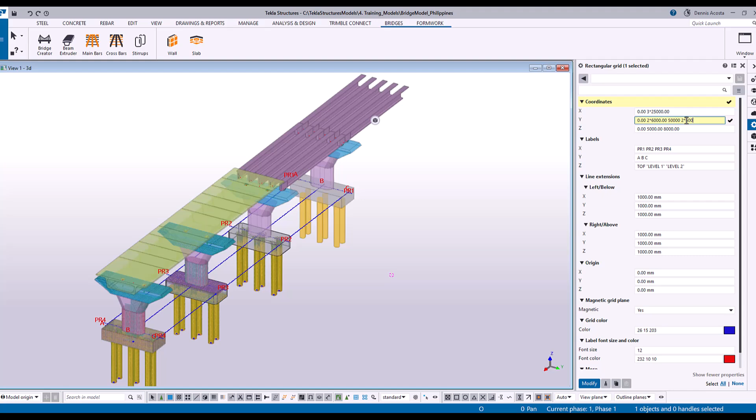Let's record. Okay, sa grid line, we'll start with a grid line. Sa grid line, doon sa Y direction, after 6,000, you type space, and then add 50,000. And then space, 2 times 5,000. And then you will get this one.

Parang naglagay lang ako ng additional grid para ito yung magiging working grid ko to create the pier. Okay? So after 6,000 sa Y direction, mag-add ka ng 50,000 or even more if you like. And then i-right-click mo, fit work area. Okay? And then mag-add ka ng 2 times 5,000.

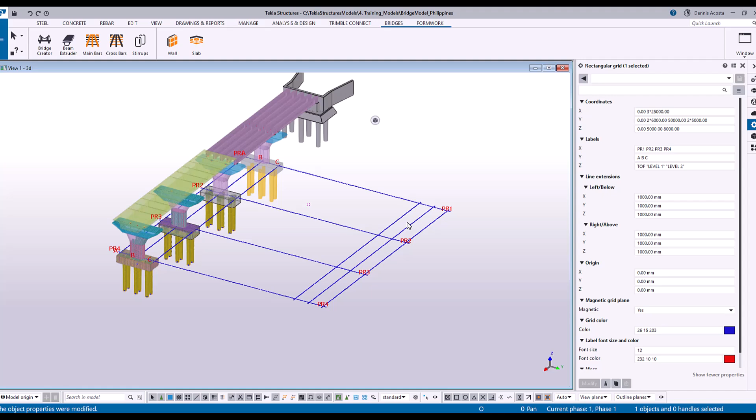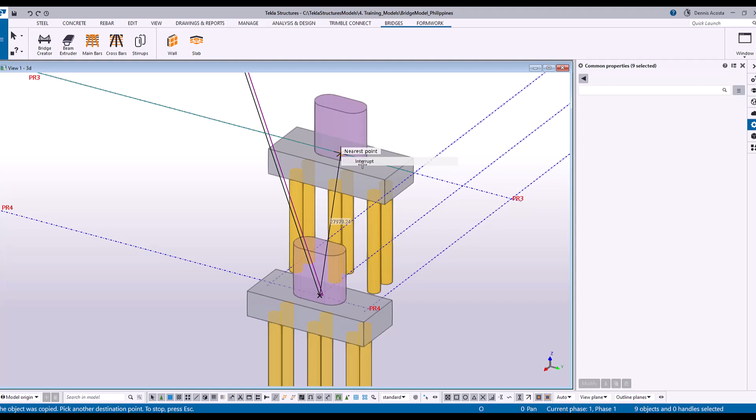Okay, so next is ang gagawin ko rito is I'm going to copy ito. Kopyahin nyo yung isang part. Copy. Put it here. So ang kinopya ko lang, kasi gagamitin pa rin natin yung nasa bottom part.

So ito, gagawin lang natin itong sa halip na 5,000, gawin natin itong 10,000. Okay? Ginawa ko lang siyang 10,000. And then,

Maglalagay ngayon tayo dito ng beam. Okay? Yung beam. So actually sa beam, as much as possible, kung meron tayong... what you call that? Kung meron tayong profile with a shape, it's better kaysa sa mag-cut tayo.

Kasi yung cuts medyo, ibabayin mo pa. Pero kung meron tayong shape, much better. So siguro, ang gagawin natin dito is let us create our own profile. This one. Kasi hindi pa natin natutunan yesterday yun, pinakita ko lang sa inyo. Let's try today. Kasi yun din naman ang start ng custom component. Magkakaroon tayo ng konting equation, pero madali lang siya.

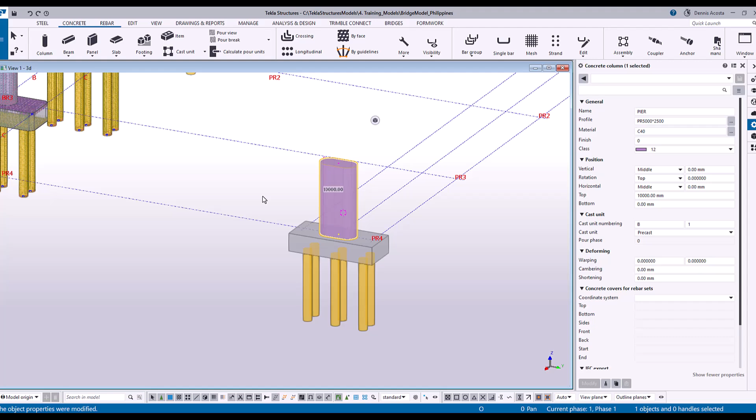Okay, so look. Just follow my lead. So once you have this, kindly go to the catalog and then define profiles and then define cross-section in Sketch Editor. So these are mostly advanced training, pero we'll make it simple para mas maintindihan natin. Okay? So punta lang kayo sa catalog and then define profiles and then define cross-sections.

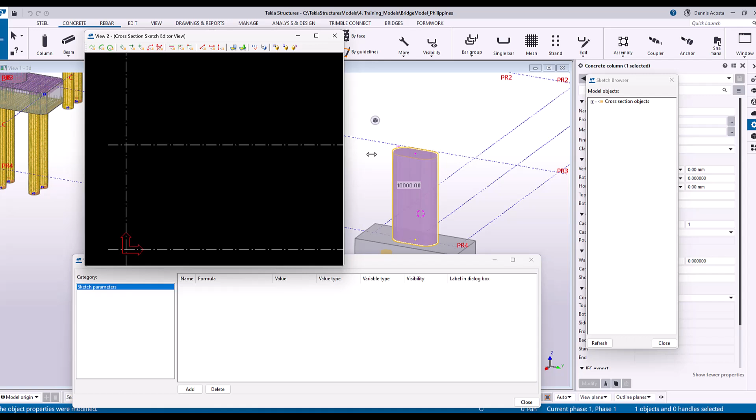Okay, done? Ito yung in-install natin kahapon na solver. So ngayon, may open nyo na siya. So this is another editor in Tekla Structure. Okay, new editor sa Tekla Structure. So ang gagawin lang natin dito, since we called it Sketch Editor, so we can sketch the shape. Okay, we can sketch the shape.

Okay, so just do this, look. Sa dulo, makikita nyo, sketch polyline. So lahat nandito na. Sketch polyline. So click nyo lang yung sketch polyline. And then pwede na tayong mag-sketch dito. I-zoom in nyo lang ng konti. Kasi pag sinunod nyo yung grid lines, masyadong mahaba yan.

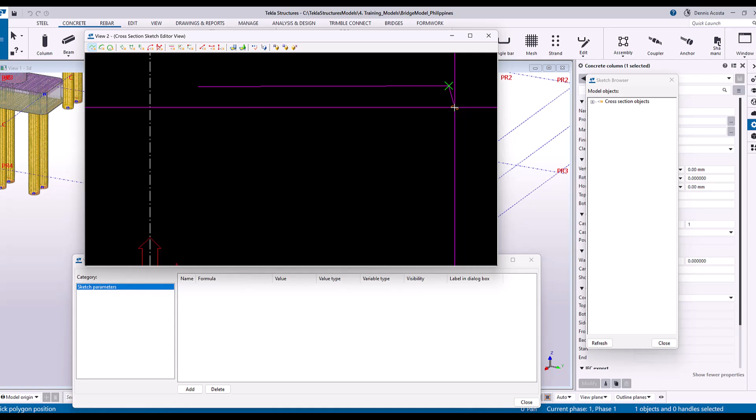15 meters yan. So look ha. 1, okay. 1, 2, and then 3. Actually, pwede ka nga maglagay dito ng... hindi, straight na lang natin. You press O para hindi siya naka-ortho. Again, ulitin natin ha. Sketch, polyline. 1, 2. Kahit hindi siya straight, no worry ha. 2, 3, 4, 5, 6, 7, and then middle button of your mouse.

So make it sure na nakuha nyo tong shape na to. You don't need to close it. Just sketch similar to this. Okay? Don't worry kung siya ay nakaslant. Doesn't need to be straight. Okay? Don't worry. Kaya nga ano yan sketch lang siya, sketch.

Yeah, okay lang sir. Okay, good. Okay na.

Okay, so now, bakit natin hindi close? Kasi meron tayo dito tinatawag na coincident constraint. So ibig sabihin, merong tools dyan para i-close it. So kung mapapansin nyo, dito sa menu, hanapin nyo itong coincident constraint.

Okay? So i-click nyo siya. Click nyo siya and then pick the two ends. 1 and then 2. So ayun. The reason why, minsan kasi, akala natin naka-close na siya, pero hindi. So it's better, open it and then use the coincident to close it.

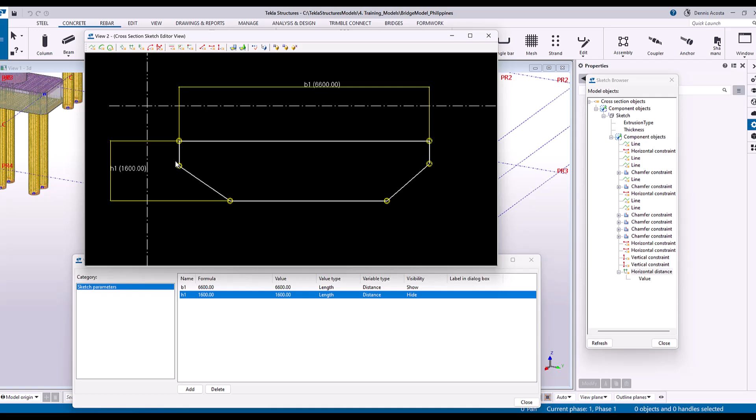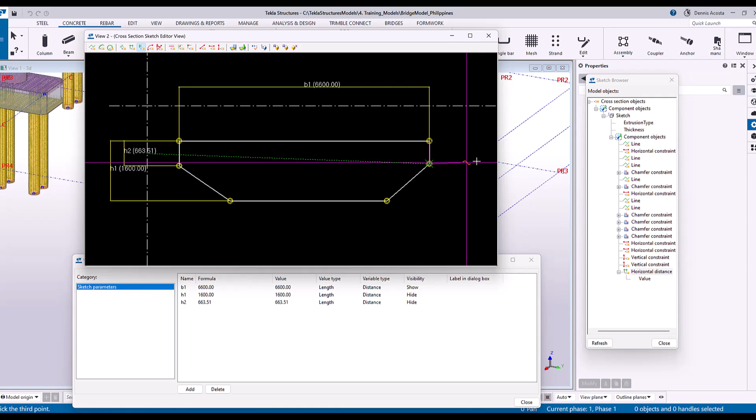This one. Kung mapapansin nyo, sketch uli ng vertical, itong dalawang side na to, maglalagay tayo ng dimension dito. 1 and then 2. So, yung H2, gawin kong 600. Okay, ginawa kong 600 yung H2, di ba?

Ngayon, yung H3, para maging 600 din siya, lalagyan ko ng simple equation. Ano yung simple equation? Equals H2. And that's it. Ibig sabihin, kung ano yung H2 mo, yun yung H3. As simple as that. Sige, pakisunod yan.

So B1 is the length, height, and then H2 and H3.

Ngayon, ang tanong, sir, how about itong height na to? Do I need to add dimension? No need. Because kung ano man yung difference ng H1 and H2, that will be the height of your slope. So no need na. Kasi pag nilagyan mo yun, magkakaroon ng complication.

Okay. Walang ano yan. Kasi nagkaroon, kasi siya, dapat mas malaki to kaysa dito.

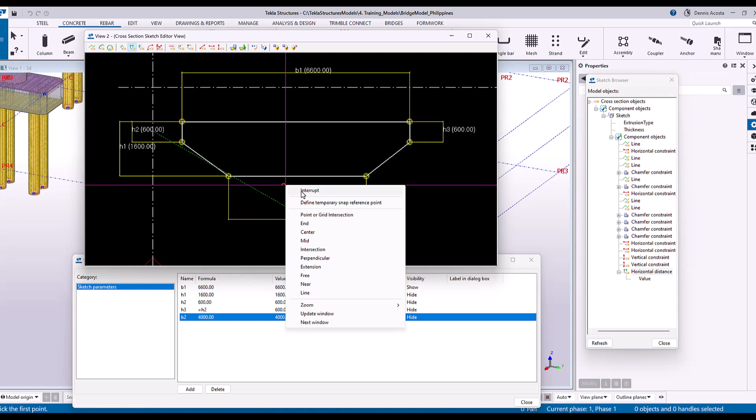So, kung mapapansin mo, gawin natin 4,000 lang. Okay, sa inyo, gawin nyo lang siyang whole number, okay? So to make it a center, click here, 1 and then 2.

So mapapansin nyo, meron ditong B is 1346. Tama? Ngayon, to make it center, tatanggalin natin itong value sa B. Yung B natin ngayon,

B3, magkakaroon tayo ngayon ng formula. Ano yung formula? equals, open parenthesis, B1, minus B2, divided by 2. Okay? So kung ano yung sagot dito, automatically, magiging equal siya. Tama? So here, it will be equals B1 minus B2 over 2. There you go.

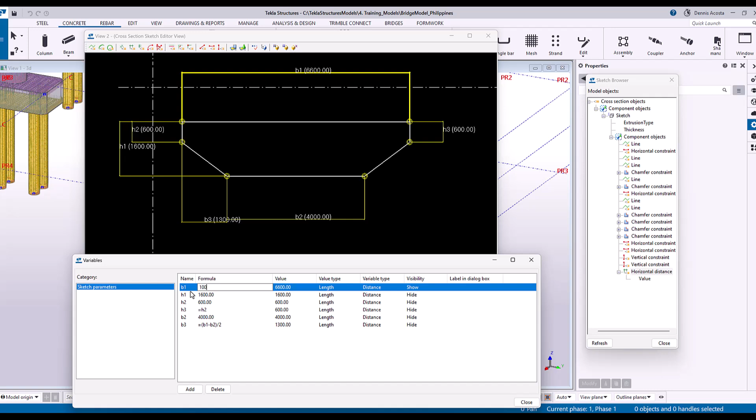1, 3. So kung ang gagawin ko is, okay, kung gagawin ko tong 10 meters, ayun yung shape ko. Tama? Eight meters. Ayun yung shape ko.

So, kung ano yung value na ilagay nyo rito, then that will be the default value. Pero, default value lang siya. So, the good thing here is you can change it later. Kung gusto mo dito, 8 meters, 10 meters, 2 meters. Pero make it sure na yung value nito is always bigger than this value. Kasi pag hindi, then distorted ulit yan.

Okay. Now, in the visibility, what are the elements that we need to show? First is B1 kasi show kung ano yung i-change natin, kaya i-show. So, yung B1, i-show ba natin? Yes or no? Yes. Yung H1, i-show ba natin? Yes. Then put, I'm just typing S, means show. And then yung H2, yes. H3, no need. H4, B2, yes. And then B3, no need because that's automated. And then all you have to do now is close it. Lahat okay na? Okay.

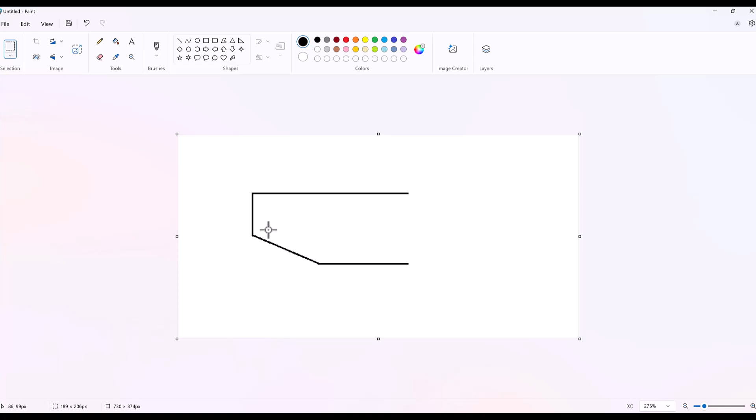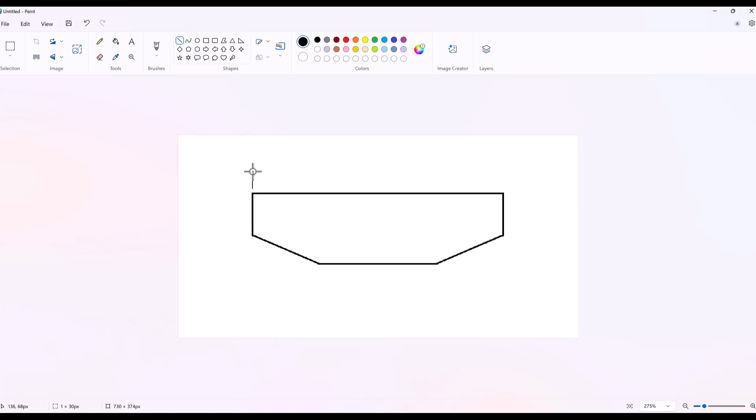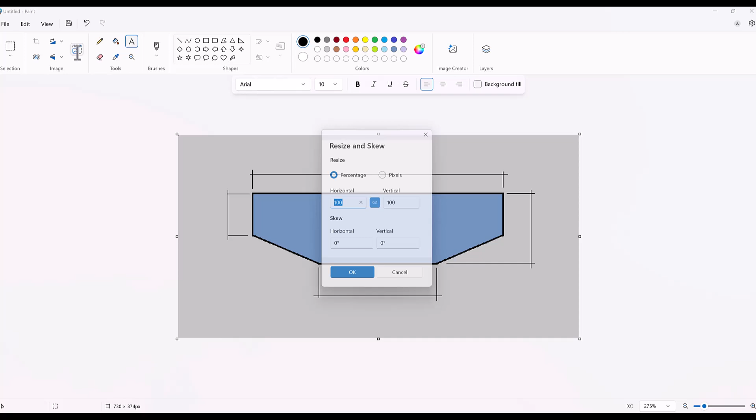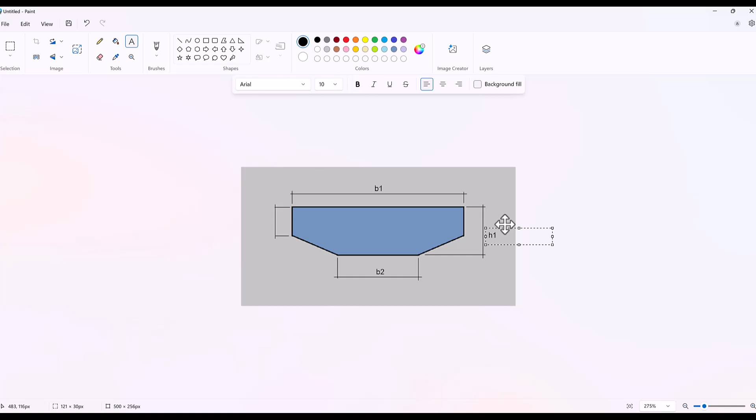Here it is, here. Just type the initial you set, then star - initial and star. Okay, so this one - B1, H1, H2.

Save as. See, okay, you'll notice I made this illustration so that if others use the profile you created, they can easily understand - what is B1, what is B2. That's the idea, so you don't need to do this, but it's recorded so you can follow later.

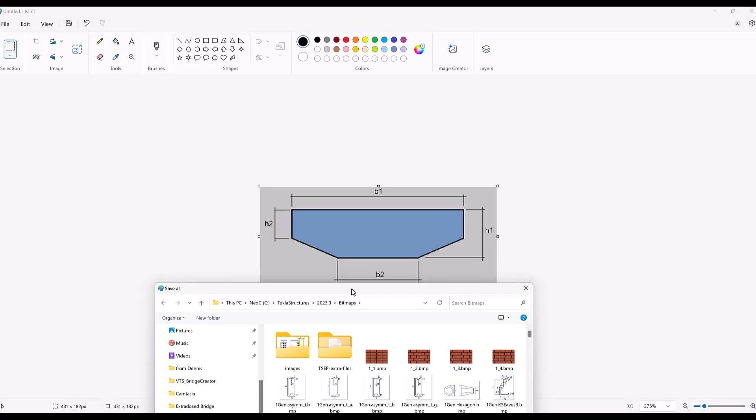I need to save that under the 2023 Tekla structure or 2024, then under the bitmap folder. So the key here is whatever initial you put, that becomes the profile name - for example mine, NED. Then save, and once I've saved this...

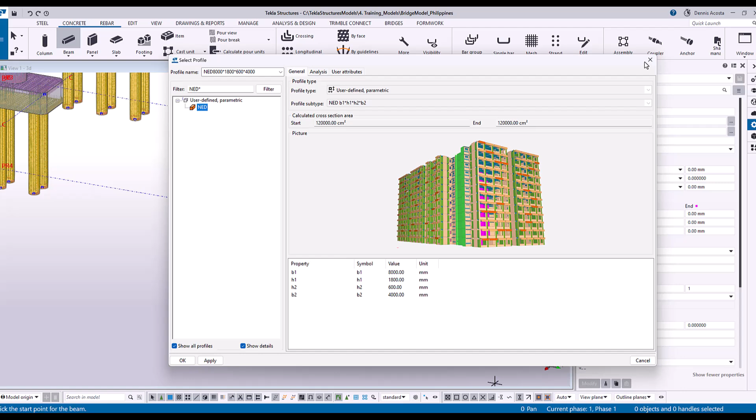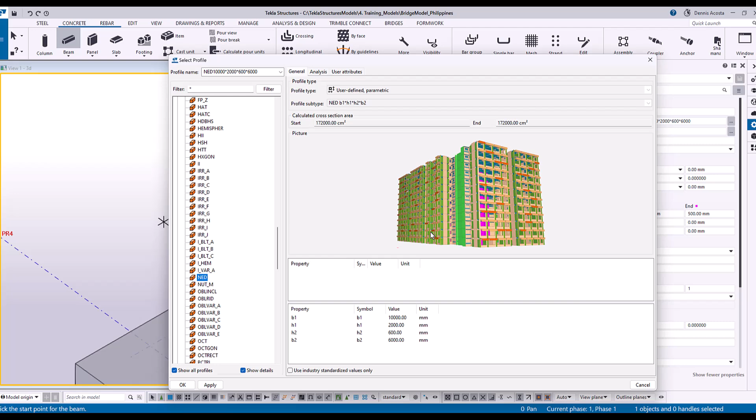Wait a moment. Okay, so let's model the crosshead here. For the crosshead, what we'll do is go to the beam and select your profile, which is this one - forget about the photo, okay. Then type here 'crosshead'.

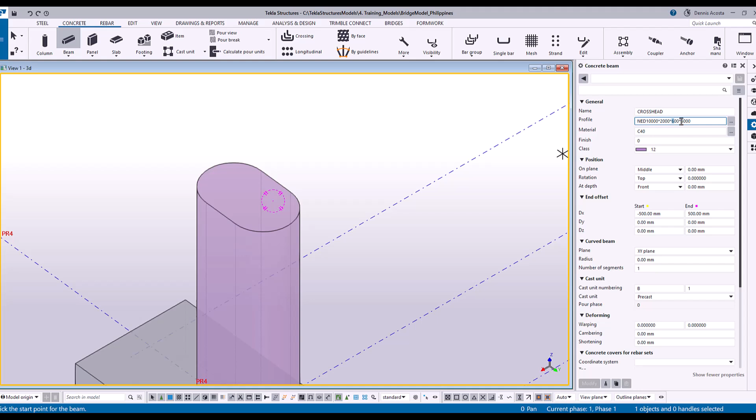Then 10 meters, I made it 10 meters. And the height is 2,000, then 600, and this one will be 5,000 - 5,000 for the center. Okay, so look - pick 1, 2, so 2.5. What I clicked is the edge on the side, because that's our main beam.

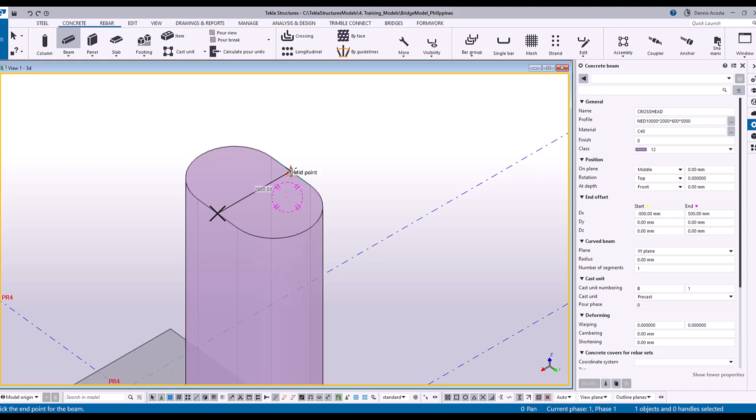We have a shape, that's our beam. This beam, you cannot pick from to the length - the length will be parametric, you can just simply add the value to the length. But for the width, that's our main modeling procedure. So pick this width - okay, look what will happen.

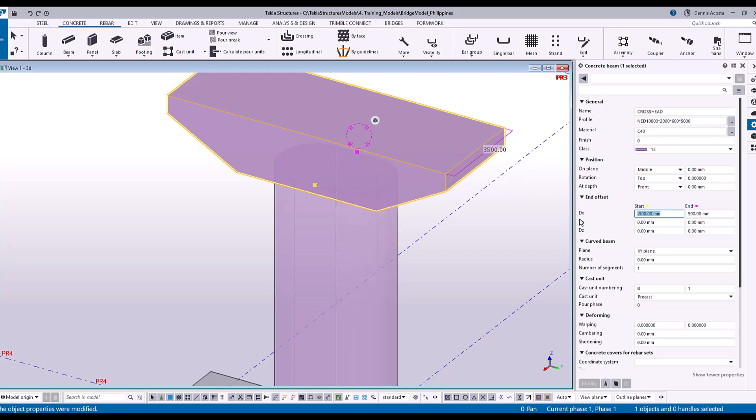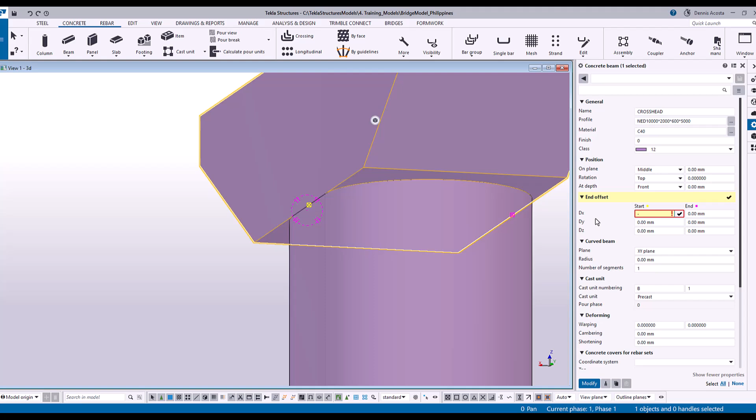So if we want to add an offset here, for example 200 - let's offset the object 200. For the DX, let's put 250, negative 250, modify - look what will happen, it will adjust. And then here, end 250, modify, so it will adjust. But the handle stays on the surface.

That will be its form. So the negative 250 value goes to the left side, and the positive 250 to the right side. You'll notice our handle still sticks on the surface of the pier, but our object extended.

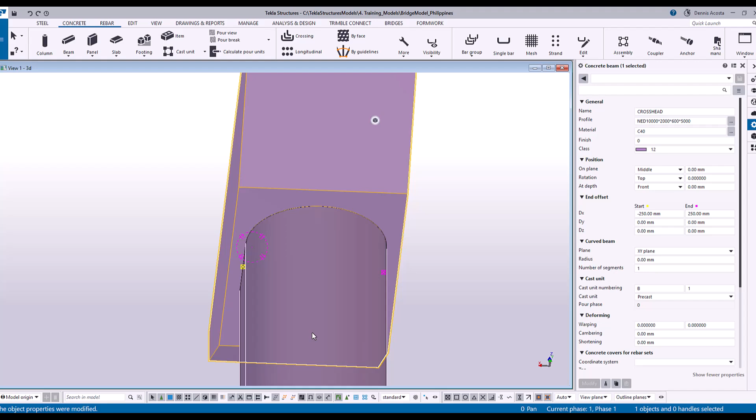That will later be used in our - what do you call that - that will be used in our custom component, for binding.

Okay, so now that we have all of this, let's do the custom component. Again, for the custom component, the intensive training for the custom component will explain every single detail, but at this point we'll simplify it to create the custom component for this pier and foundation.

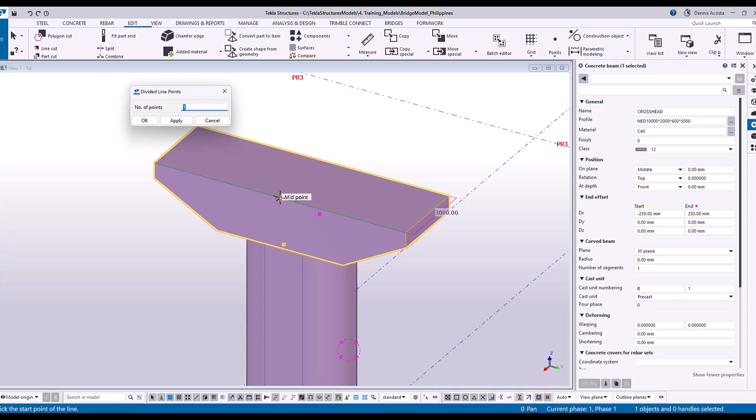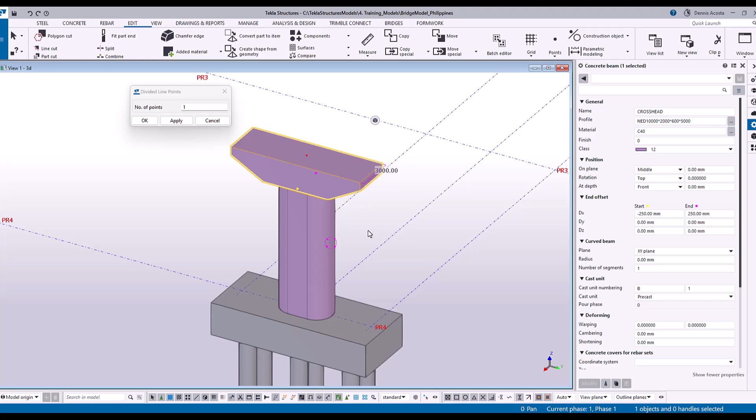Now, this time, we're going to create the simple custom component. For the custom component, I want you to open the application and component on the right side. This one, select that one. So we need to select everything.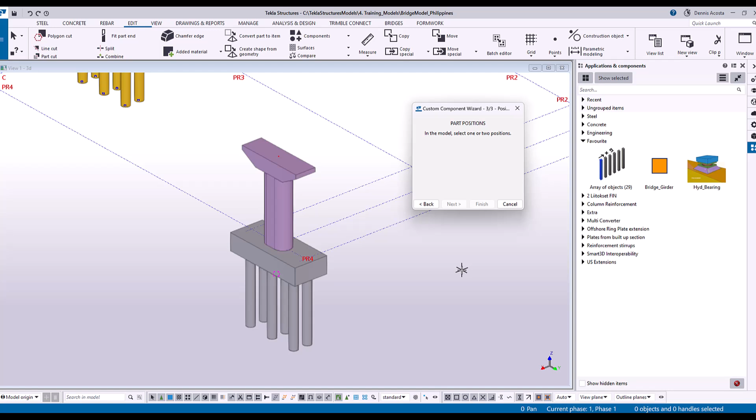So, pick the point, this one. And then pick the second point.

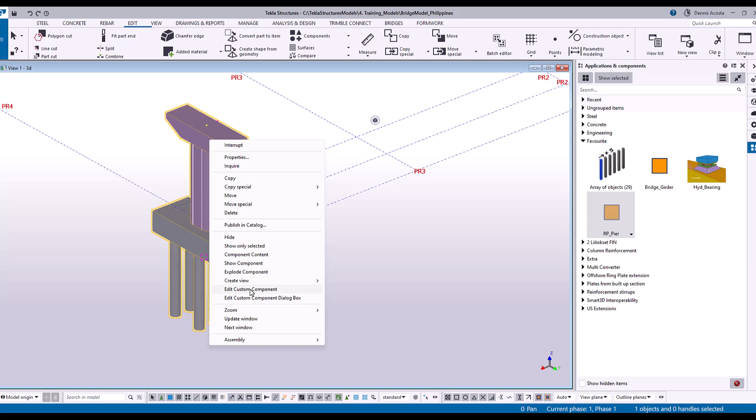Next is I want you to edit custom component. If everyone is okay with this, edit custom component. This time around, we will create parameters.

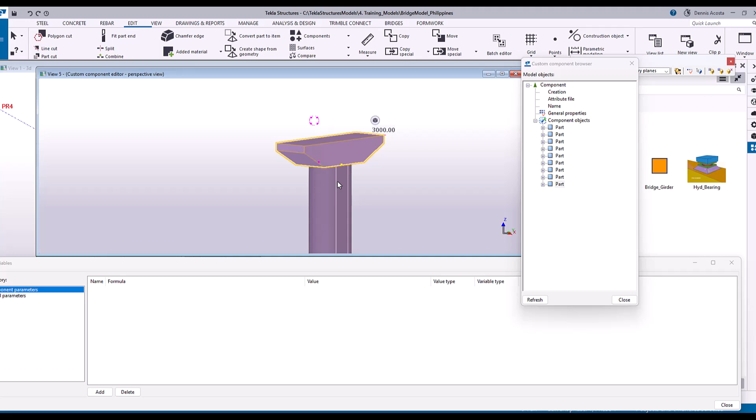Okay, halimbawa, alt key. Unang gagawin natin dito, yung ating column or pier, isi-select natin yung handle. Select natin yung dalawang handle. Pagka-select natin ng dalawang handle, makikita nyo sa component editor, itong maliit na toolbar na to, component editor. So make it sure na nakaselect ka sa boundary planes.

Okay, I will make it shortcut, hindi ko na i-explain pa dito, pero sa ngayon, I want you to select the boundary planes. Ano yung boundary planes? Itong dalawang handle na to, kapag nag-alt key ka and sinelect mo yung handle, right-click and bind to plane, then iselect mo yung bottom ng crosshead. Mangyayari dyan, pag sinelect mo, dalawang value ang lalabas dito. Anong value? D1 and D2.

Yung D1, 0, and D2 is 10 meter. Ibig sabihin, yung 10 meter na yan, nakashow, i-hide mo lang siya, and mag-add ka ng parameter, type mo lang dito yung 10 meters, kopyahin mo lang yung D2, and yung D2, palitan mo ngayon siya ng equals to P1. Okay, so ito is column height.

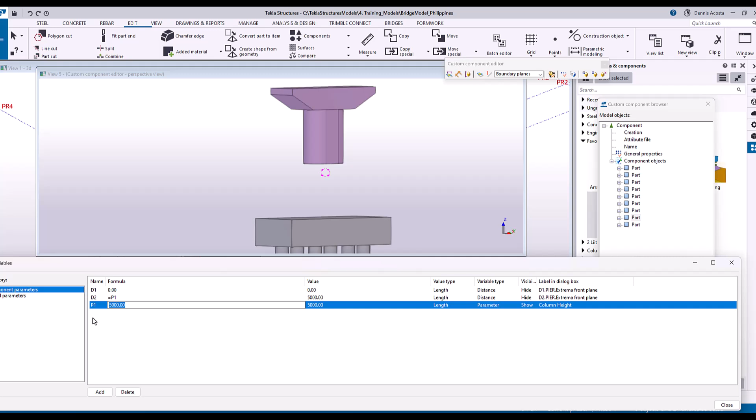Okay, pakigaya nyo siya. Column height. So anong mangyayari sa column height? Look, pag ginawa ko itong 5 meters, nakokontrol ko na ngayon yung column height. Pero, in the reference of the bottom, okay? So column height. Then halimbawa is 10 meters ulit.

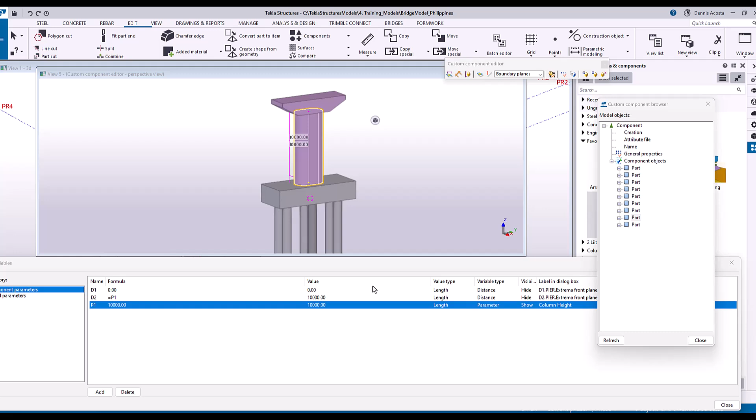Okay, so may control na tayo doon sa height ng column. Yun lang naman ang kailangan natin, height ng column. Pero, of course, we need to bind the foundation doon sa pier, para kapag yung pier natin is tumaas, yung foundation susunod. So yun ang idea. Pero ang i-on lang natin, ang nakashow lang dito is yung column height, so we make it simple. Uli, ang tanong, paano ngayon natin mai-bind yung itong pier sa column height? Sa boundary sa baba. So itry natin.

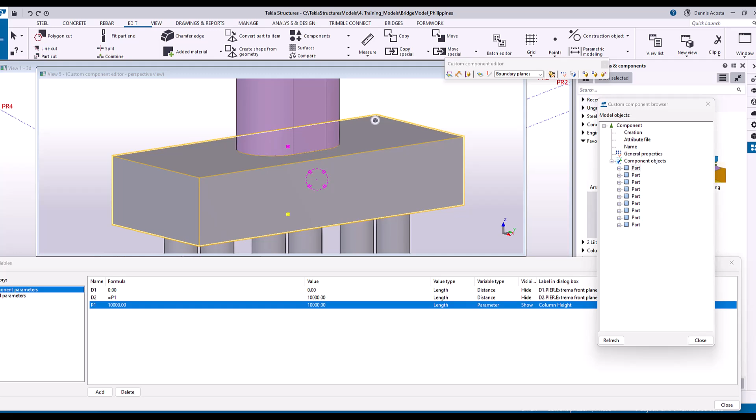Okay, by the way, nakuha nyo na ba ito? Okay, ulitin natin, delete natin siya. Una is select the column. Select the column, select nyo na, and press nyo yung Alt key. Ano yung usage ng Alt key? To select the handle. Alt key and make a window doon sa column. Ibig sabihin, na-select na natin yung dalawang handle. Tama? Ngayon, yung component editor nyo rito, makikita nyo, naka-boundary planes ba kayo?

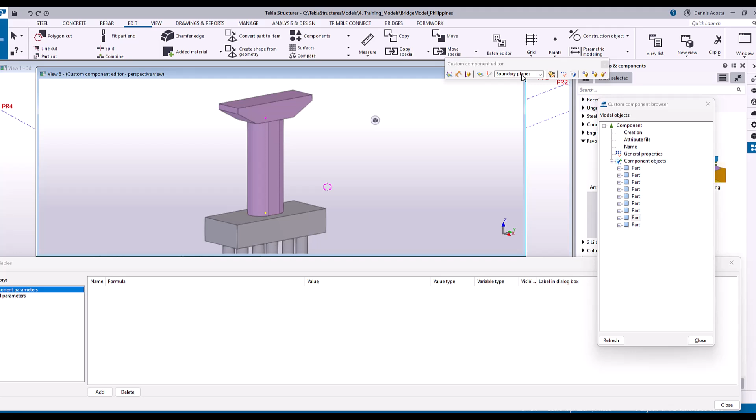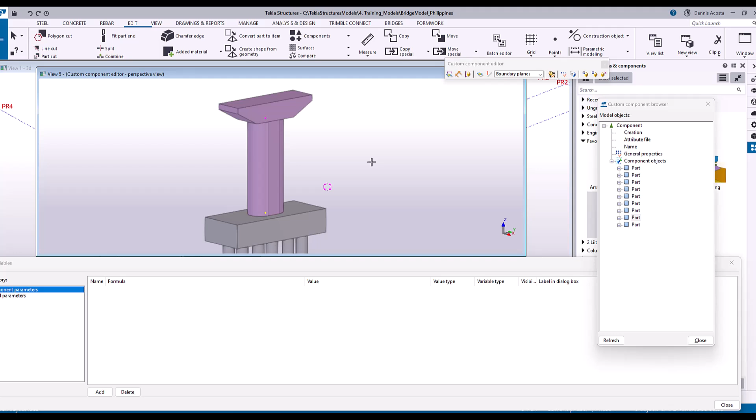Boundary planes. So ngayon, i-right click, mag-right click kayo, and bind to plane. Okay? Bind to plane. So once na-click nyo na yung bind to plane, hanapin nyo ngayon kung saang plane kayo magbabind. Saan tayong plane magbabind? Sa bottom ng crosshead. So, i-rotate nyo yung model, control, and middle button of your mouse. Naandyan pa rin yung command nyo, hindi nawawala yan unless na in-interrupt nyo. So, i-select mo yung bottom. See here? Ayan. Pag nakita nyo yung pink plane, ibig sabihin, i-click nyo yon. And lalabas ngayon dito sa formula natin yung D1 and D2. Ano yung D1? Yung taas, naka-0. Yung D2, may 10 meter.

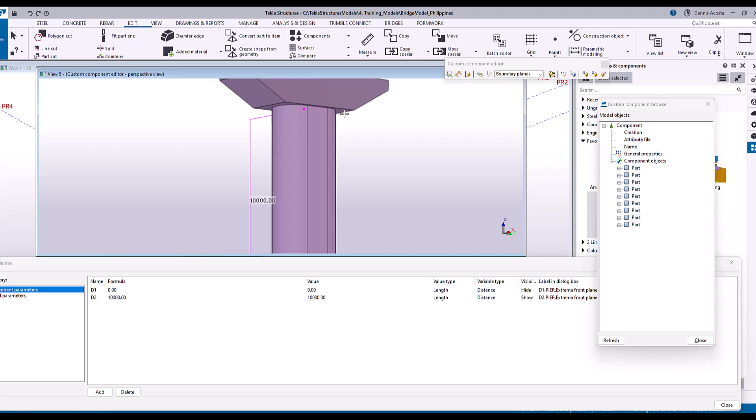So ngayon, i-control ngayon natin yung 10 meter by adding parameter. Paano tayo mag-a-add ng parameter? I-interrupt mo na siya. Nakita nyo yung add, click nyo yung add. And all you have to do is to copy the value. Gawin mo siyang 10 meters. Once na 10 meters na yan, saka mo siya i-equate. Don't make it 0 bago okay, baka mamaya, nag-add ka ng parameter 1, bago in-equate mo agad siya sa D2.

0 yun, so mawawala. Ang rules dito, once na mag-add ka ng parameter, halimbawa, kasi I can bind everything in one go. But the problem is, mahihirapan tayong i-identify ano ba yung D1, ano ba yung D2, ano ba yung D3. So ang gagawin dito, sa custom components, ang sikreto dyan is, kung gusto mong i-control itong value ng D, mag-add ka agad ng parameter. Huwag ka munang mag-bind, isa-isa. Halimbawa, tulad dito, gusto mong i-control yung D2. So, add ka muna ng parameter, kopyahin mo yung value, and saka mo siya i-equate na D2 equals to P1.

Okay? And makikita mo rito, label in dialog box. Yung D2, gawin mo siyang hide kasi pag naka-show siya, lalabas siya sa dialog box. Ngayon, yung show naman, lagyan mo na ngayon siya ng pangalan. Halimbawa, pier height.

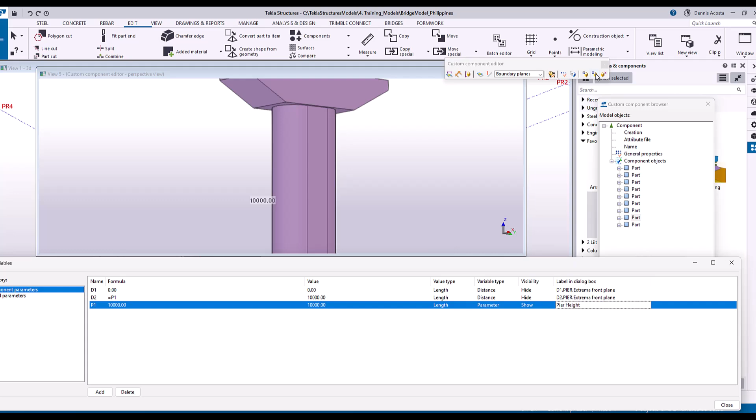Okay, i-close ko muna. Papakita ko sa inyo kung ano yung outcome nito. You don't have to do this, pero pag close ko nito, tingnan nyo, pag double click ko nito, pier height, halimbawa it is 5,000, modify, ayun.

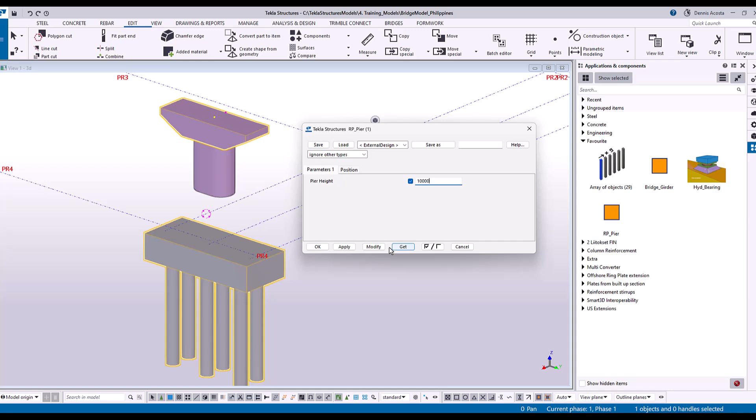Of course, behind your mind, you will ask, bakit yung foundation ko hindi sumunod? Wala pa tayong ginagawa doon, column pa lang tayo, okay? So, balikan natin. 10,000, and modify. And ngayon, pwede na natin ngayon siyang i-edit uli, custom component, and continue binding.

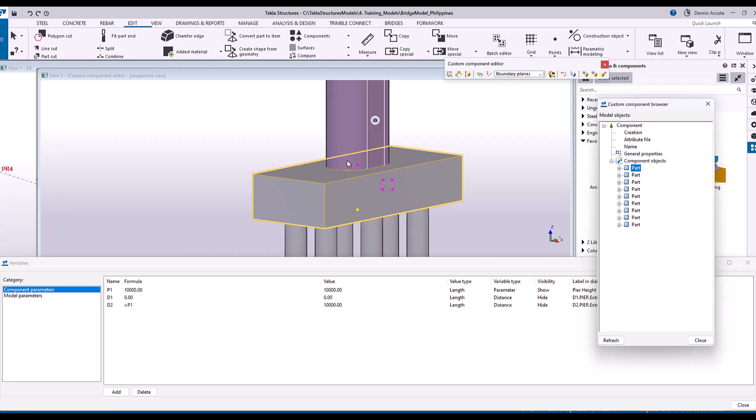Select natin. Tingnan natin ha. Kapag i-click ko to, right click, bind to. Hindi niya nasiselect, oh. Hindi niya nasiselect, di ba? So, gawan natin ang paraan.

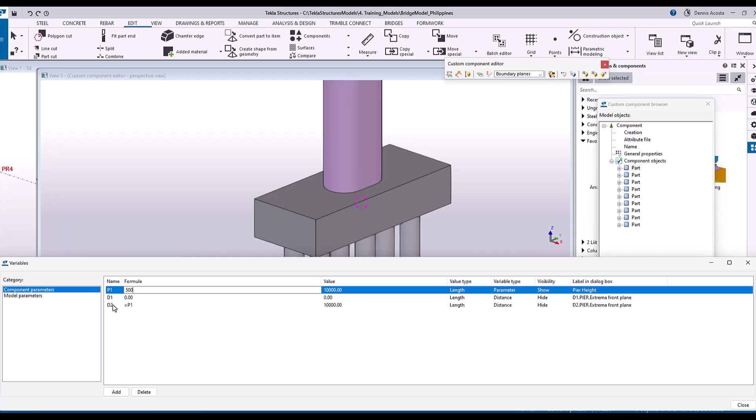Gawin ko tong 5,000. And then, select ko to. Bind to plane. Ayun, select ko na. Pero, kapag i-bind natin dito, tingnan nyo, may value dyan na lalabas, which is 7,500 at saka 5,000. Tama? 7,500 kasi yun yung height ng ano natin.

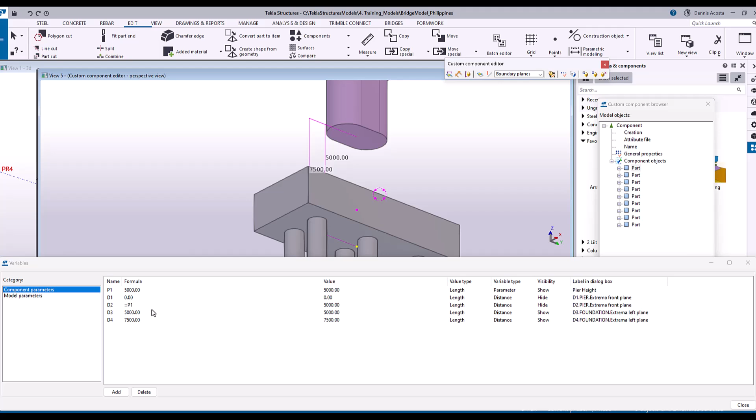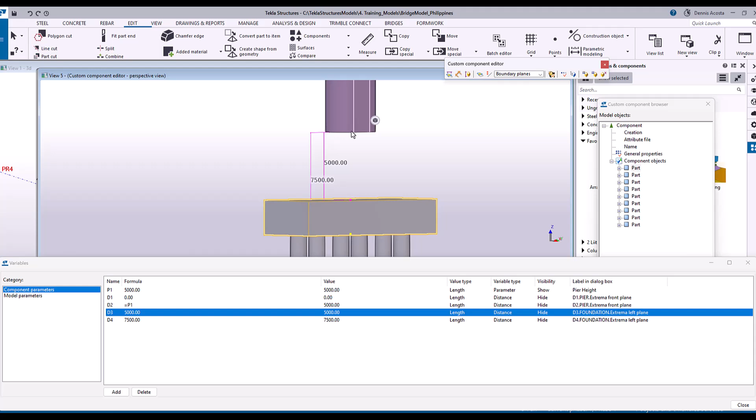So ngayon, paano ngayon natin gagawin siya, paano natin siya itatama? Okay. Any guess? So yung 5,000, kasi dapat ito is naka-0, di ba? 0 dapat. O di yung 5,000 gawin mong 0. Tama?

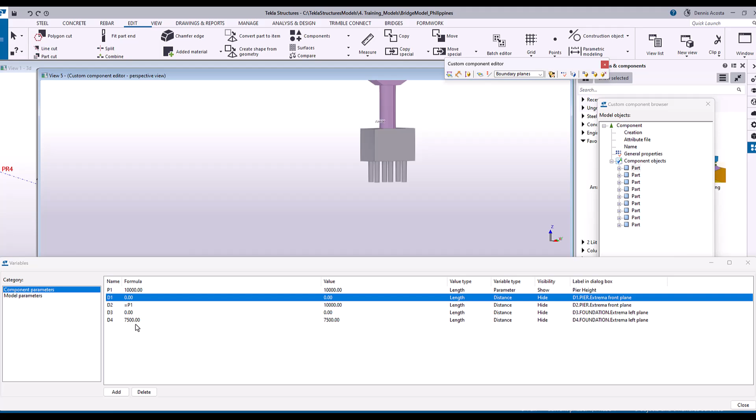Yung P1, gawin mo ulit ngayong 10,000. And then this one, gawin mo siyang 2,500. And that's it. Balik na siya. Nagets nyo? Yes, sir.

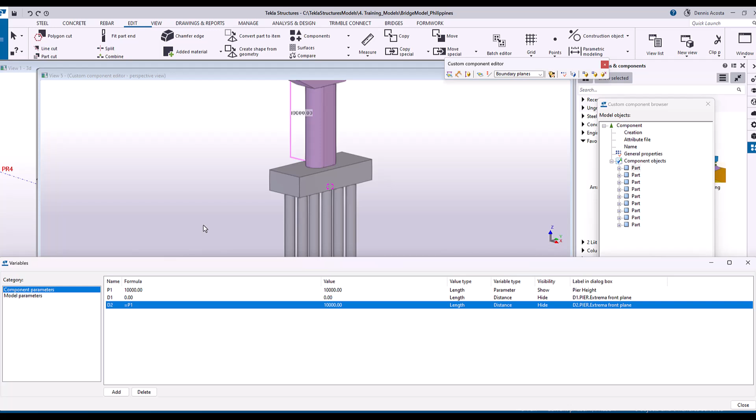Okay. Let's repeat. Delete ko yung D4, D3 ha. Ulit. Pag sinelect mo yung foundation, hindi mo siya mai-bind sa ilalim. So, gagawa natin ng paraan.

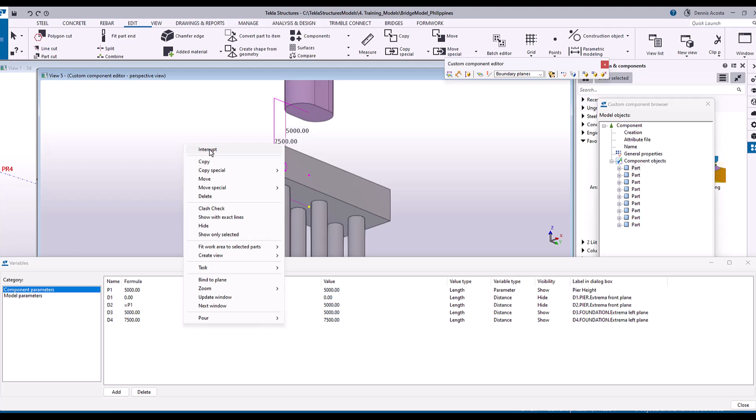Una, yung P1, gawin mo siyang 5,000 para ma-select mo yung bottom ng pier. I-select mo yung handle ng foundation, right-click, bind mo siya doon sa ilalim ng pier. Tama? So, magkakaroon ng value. Okay, magkakaroon ng value. So, itong value ngayon, yung D3, it's supposed to be 0. So, palitan mo siya ng 0.

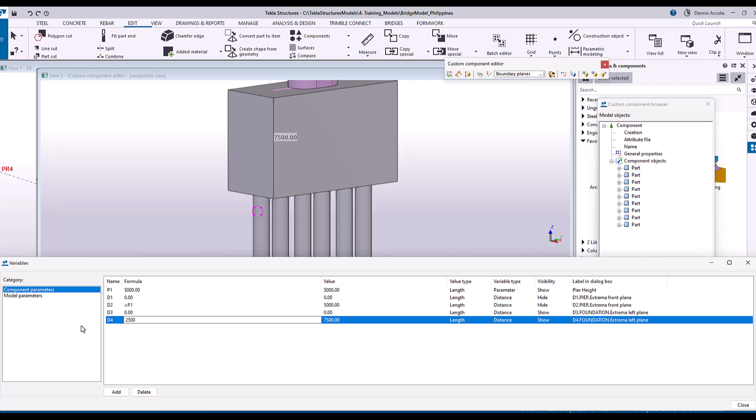Ngayon, susunod siya doon sa ano? Sa ilalim. Ang gagawin mo ngayon, i-adjust mo ngayon yung, okay, ito, 2,500. Gawin mo siyang 2,500. Pero, ang problema nito, hindi susunod yung pile. No worry, kasi yung pile is nandun pa rin siya sa 10-meter mark. So, kung ano yung sequence, pwede nyong pagkasunod-sunod rin yung sequence niyan. Basta ang mahalaga is yung D3 is naka-0 doon sa bottom ng pier. Okay, any question here?

Hindi na gets? Okay. And then, make it sure na yung D3 and D4 will be hidden.

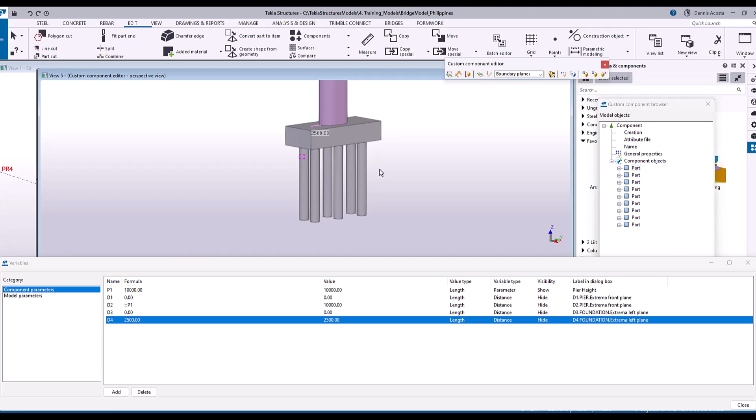Okay. Ang last part natin dito, okay, to those who have finished their work, ang last part natin is to bind the pier, the pile doon sa bottom ng foundation. Pero, okay, pag ibinayin kasi natin itong handle ng pile sa bottom ng foundation, magkakaroon siya ng value, which is yung visibility naka-show. I-hide lang natin lahat yon to make it fix.

Kasi hindi na natin i-control yung height doon. We spent a lot of time already dito. Kumbaga, i-fix natin siya. Kasi ang mahalaga lang dito is makuha lang natin yung column height. Okay? Para ma-adjust natin sa bridge creator. Yun lang naman ang idea natin dito.

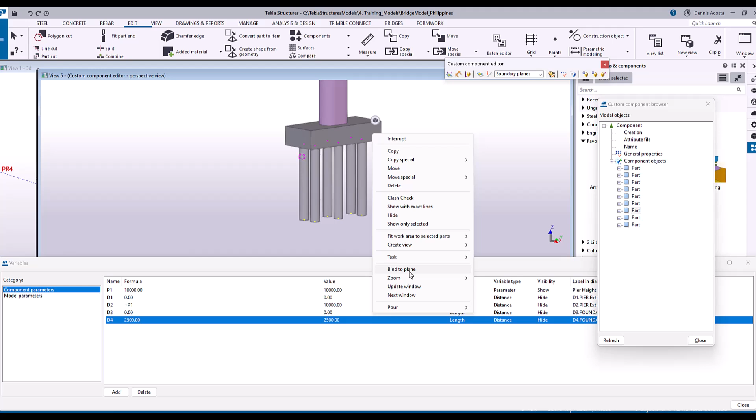Okay? Okay, look. Alt key, bind to plane, and then dito sa bottom, makikita mo ang daming value niyan, di ba? So, leave it there. I-hide lang natin. Kahit may value siya, basta ini-hide mo siya, hide. Type mo lang yung letter H and then move down. Ma-hide na siya.

So, look. Pag change natin yung P1 to 5 meters, see? Nag-move na siya. 10 meters. Baga sir, para ma-retain lang yung height. Ma-retain lang yung height. Yun lang naman kailangan natin para makuha natin to eh.

Mas minded siya. Oh, pero kung gusto nyo take it further, pwede nyo pang i-develop yan. Gusto nyo palitan yung size ng pier, palitan yung size ng pile, yung height ng pile, pwede. Kaya lang, we don't have much time to do that. Okay? So ito nga lang, medyo simple lang to, pero it takes some time, ha?

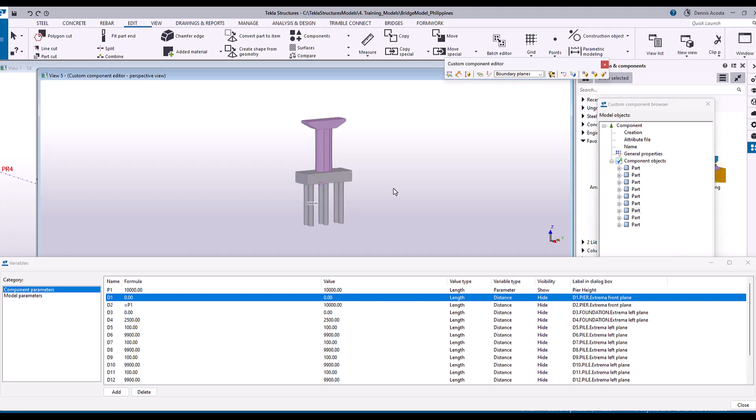And by the way, this one is more on the advanced training. Kaya lang, gusto ko lang ipakita sa inyo yung capability. Okay? So I make it simple. And dito, naka-fix lahat yung profile nito. Basta ang kailangan lang natin dito is to move yung ating column height.

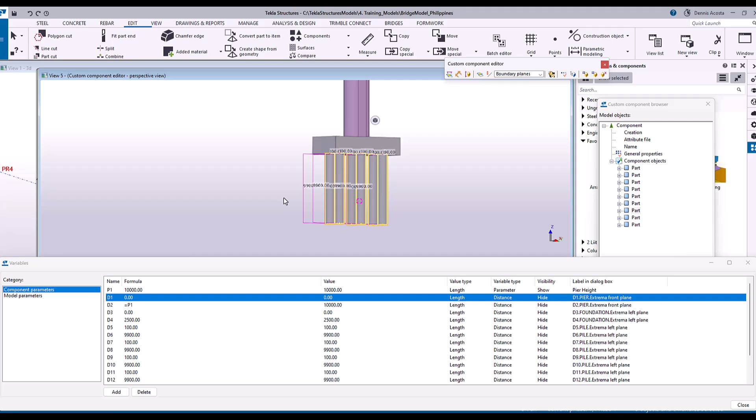Okay, again, select nyo tong pile and then Alt key and select handle and then right click, bind to plane. And then lahat ng value is gawin nyo lang siyang hidden para naka-fix yung ating information there. And then close it and then yes.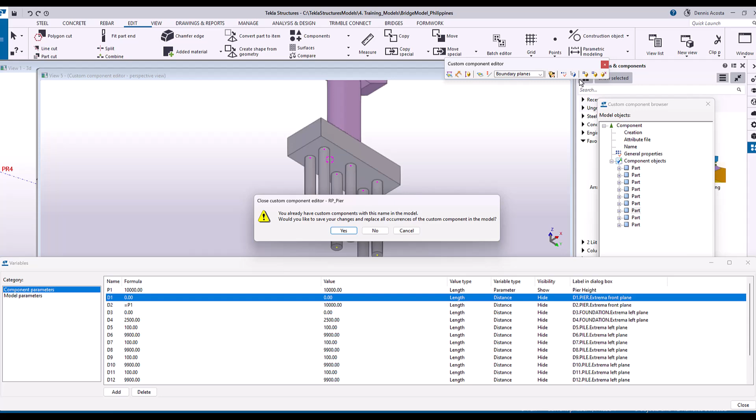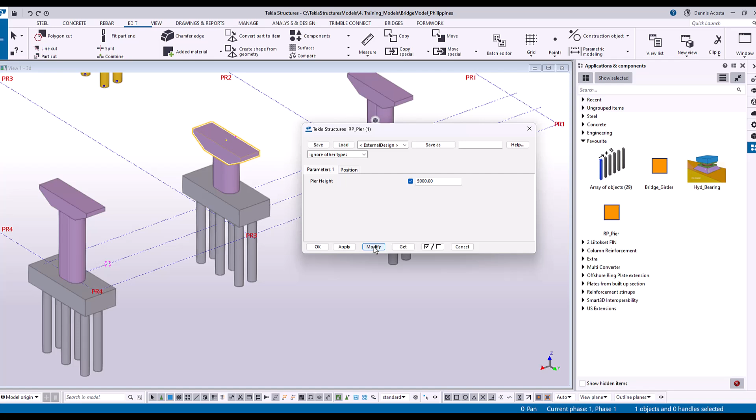So ang mangyayari dito, kung mapapansin nyo, kapag halimbawa kinopy ko to, no? Copy from this point to this point to this point. So ito is something like yung height nito is 5 meters. Modify. So tataas siya 5 meters. Pero sa adjustment ko sa Bridge Creator, pwede ko siyang i-move. Pwede ko siyang i-move pababa. So ganyan ang magiging forma niyan.

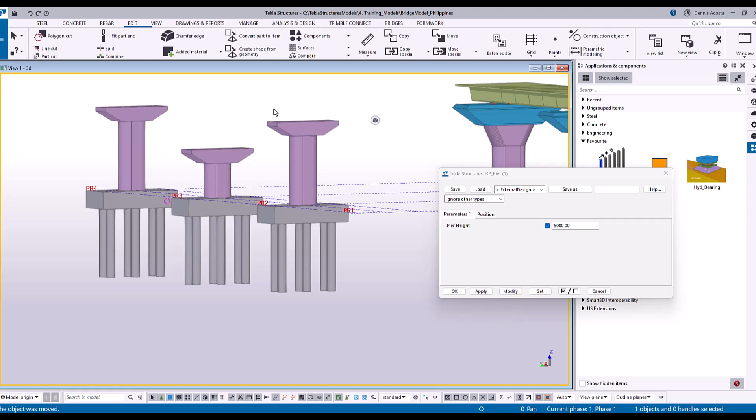Okay? So this will be our end goal. Hindi natin kinontrol yung mga sizes ng column natin, sizes ng pier, sizes ng crosshead, but we only control the height. Okay? All right.